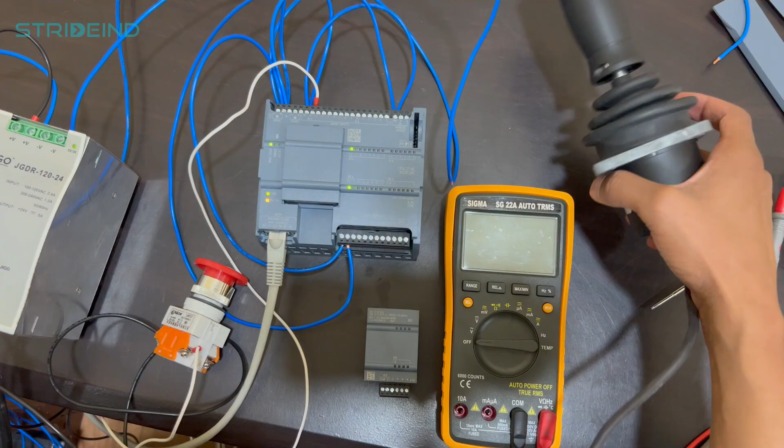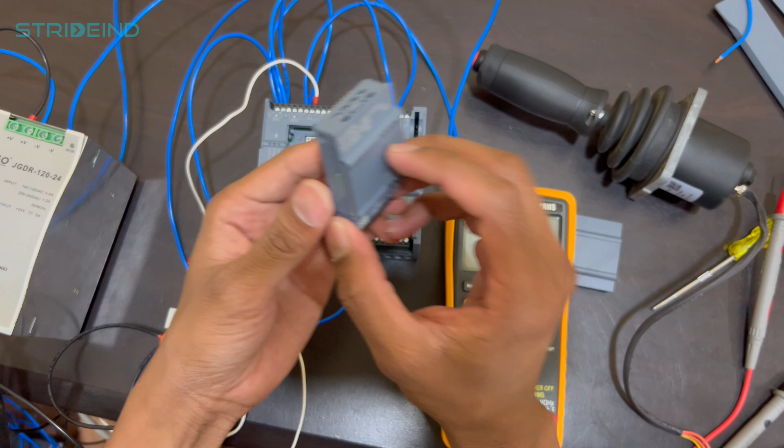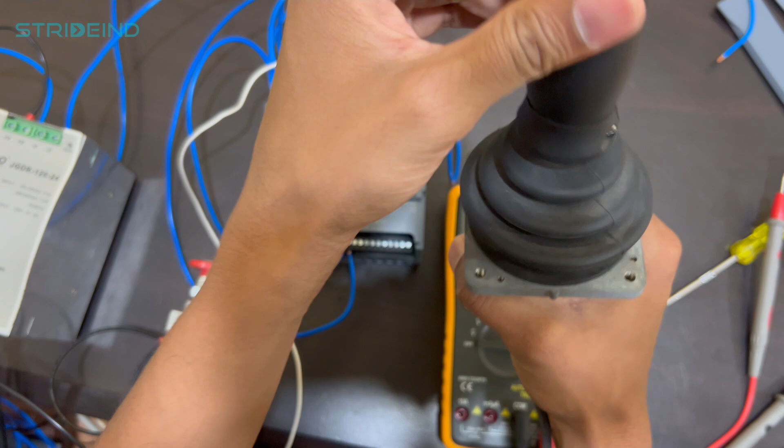First we need to set up our PLC. Let it power down. So let's say we're going to install this analog output module in the controller. So this will give us analog output. Then we need to connect this joystick. This joystick has one axis, okay, then one push button.

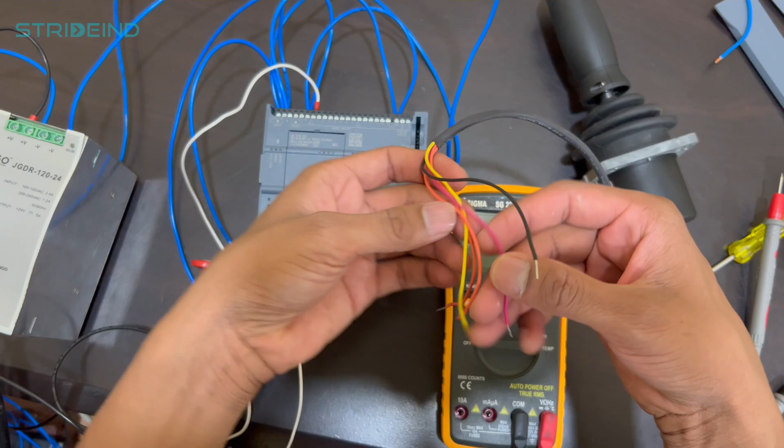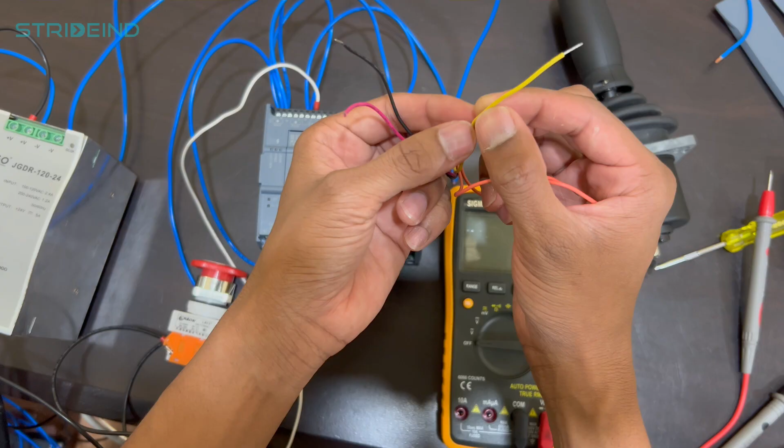So let's wire the joystick in the PLC. We need to give, this is 24 volt, this negative. This is signal analog 0 to 10 volt and this is one switch. Okay, so we're gonna wire this. Actually I'm gonna use power output from the PLC itself to get 24 volt in the joystick.

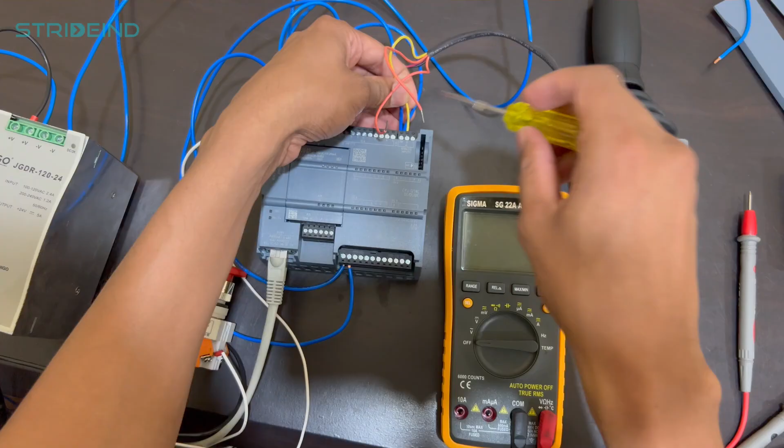Okay, that's ready. Now we'll connect this analog input to analog input 1. Okay, now we need one 24 volt. Okay, we can take it from the supply side. This will be going to our digital input number 1, that's our digital input 2. Okay, 0.1, that is our second digital input.

Okay, so now we wire up. Okay, now the wiring is ready. Just power up and make a small function test. Actually you cannot see analog input here in any light. Digital input is all you can see. So you can see the button is working, so this should work. Now we'll go inside and see how the program is working. Okay.

Let's start programming. Now this is our last program, a digital input and a digital output. So now we're gonna add one analog input and one analog output. So first we bring our joystick, this is 0 to 10 volt to 0 to 100%, and we send this back to analog output for 0 to 10 volt output. Okay, so we have 0 to 10 volt input, 0 to 10 volt output.

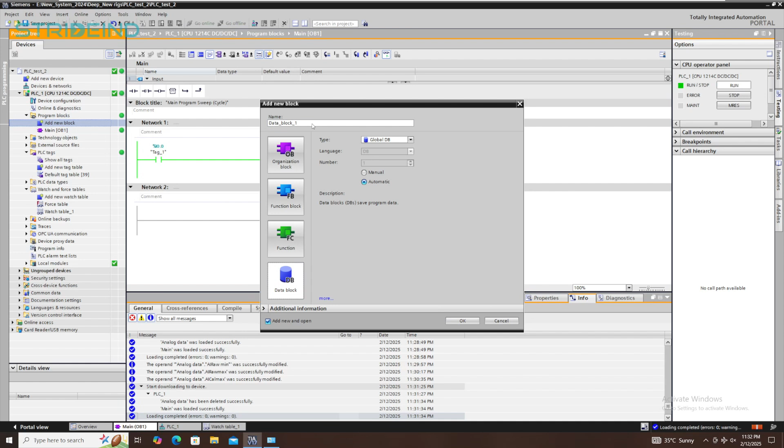So now we need to program that to happen, because you have input connected to the joystick and to the controller, and the output needs to go from the controller. Let's start with the program. Before we start the program, we add one data block where we will set a set of values, these are analog data. So we make a calibration. It's a 2-point calibration kind of thing we're gonna make here.

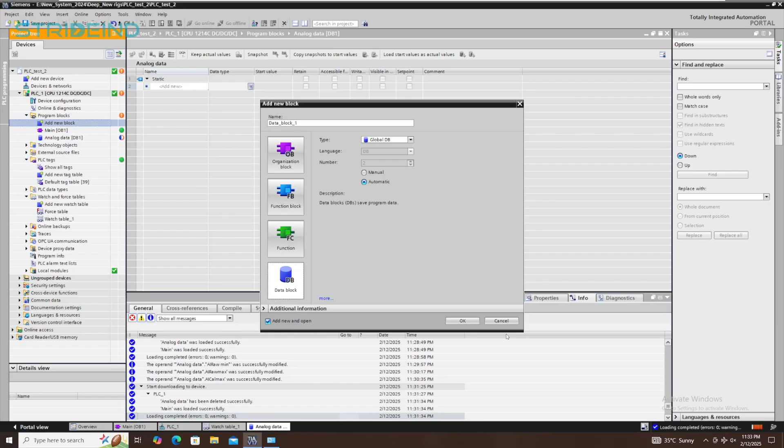Okay, I didn't explain to you what this data block is. Data blocks are a kind of database we have in the PLC, where we store the data and process the data from there. So basically when we have some tagging for a big project, we'll be adding them in the data block to identify them. So our analog data will be added in this data block, and we will say AI raw min, AI raw max. This is raw minimum, raw maximum, analog input.

Then AI NORM_X, then AI cal min, AI cal max. So this is calibration minimum and calibration maximum. Then we have our analog output, AO raw min, AO raw max, then AO NORM_X, then AO cal min, AO cal max. So these are minimum maximum calibration.

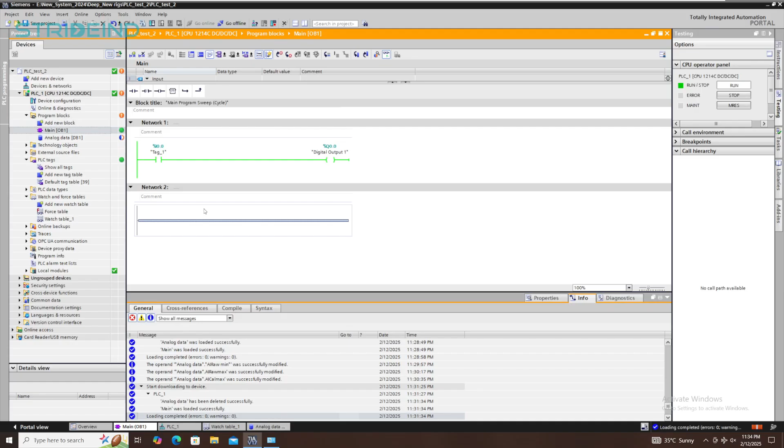You have this 2-point calibration, so you need a raw minimum and maximum value and a calibration minimum and maximum value. This is how you see it wherever you are calibrating, you have these 4 values to put. So this is the same thing we're gonna program in the PLC. So let's start programming. We will do one thing. Okay, we'll start doing it here.

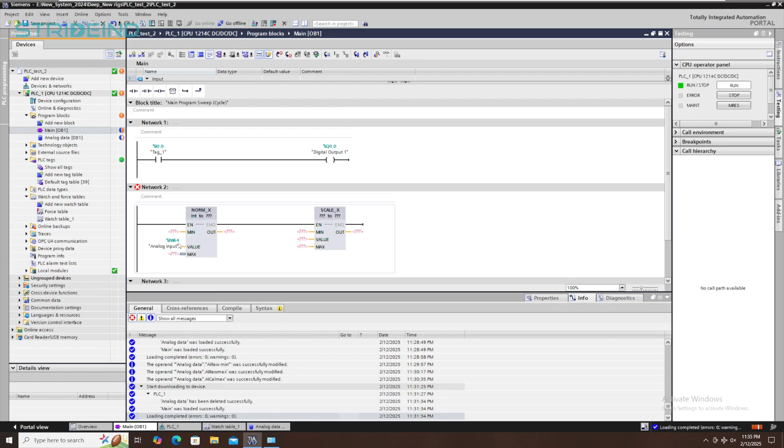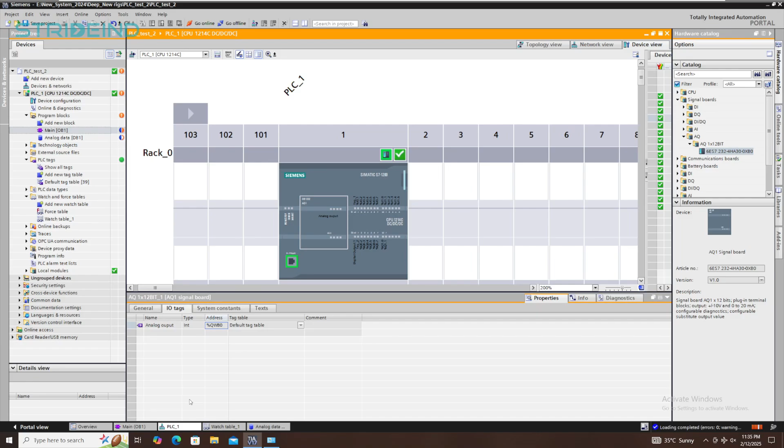Okay, so we call a block called NORM_X, then we call one block called SCALE_X. Okay, then we take our analog input. This is %IW64. Here you can see that this is our analog input and this is our analog output. Okay, so analog input, then we choose here analog data, sorry, because this needs to be real, then this needs to be real, then you need to come here again.

Okay, sorry, because I made a mistake here. All this data needs to be real. Real is a type of analog data. So we have different data types. It is integer, you can see here. You have a set of things you can put here, but we normally use real for analog data. You can also use word in some cases, but I use real data. So this first block we're doing to normalize, and the second one we're gonna scale.

So here we need to put the raw input. I will say raw minimum and raw maximum, and output going to NORM_X out. This is AI NORM_X. Then this one again goes here, input for the SCALE_X. Then for the SCALE_X we're gonna use cal minimum and cal maximum. Now we need to have one output. This is our real output of joystick position. We say joystick position.

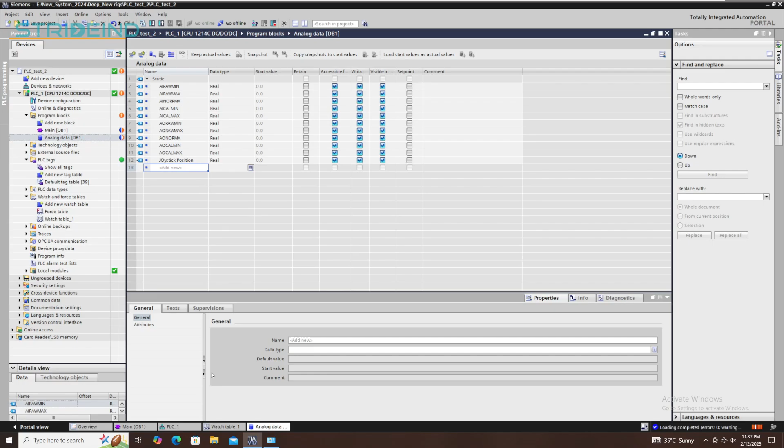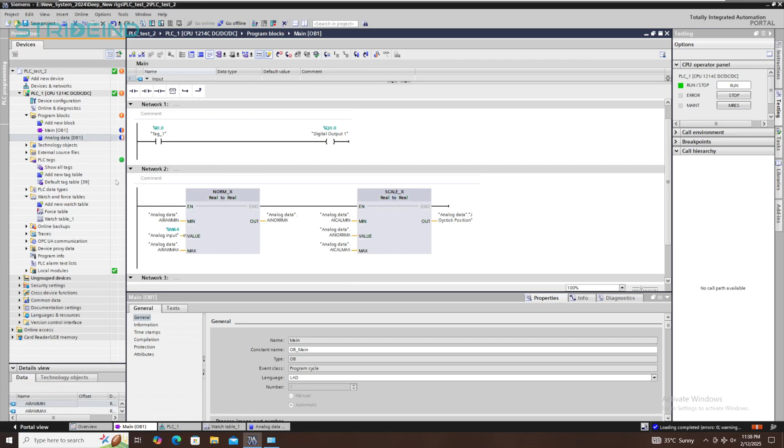So our joystick is 0 to 10 volt, and now it's in the middle position. So how this works in Siemens: we have 4 to 20 milliamps, let's say 0 to 20 milliamps, starting from 0 to 27500. This is the number. So when you have 20 milliamps, it will be 27500, and when it is 0, it's 0.

Same for analog input 0 to 10 volt. We should have a minimum, let's say half of this. So 27500 divided by 2 is 13750. So we have 0 for calibrate raw minimum, and our raw maximum should be 13750, and we need to have our joystick full position to 100.

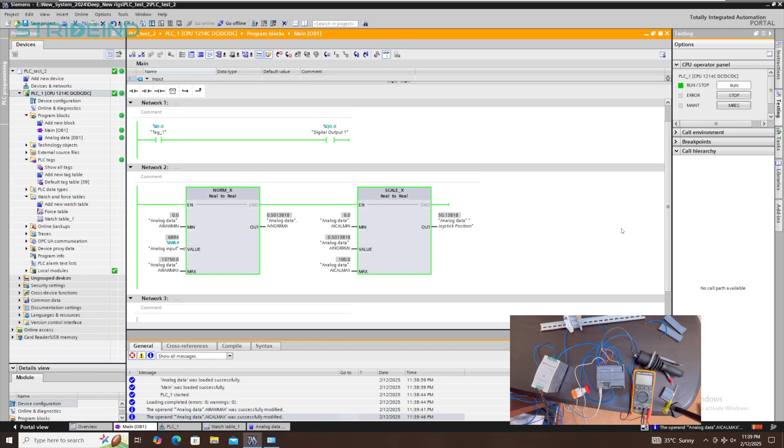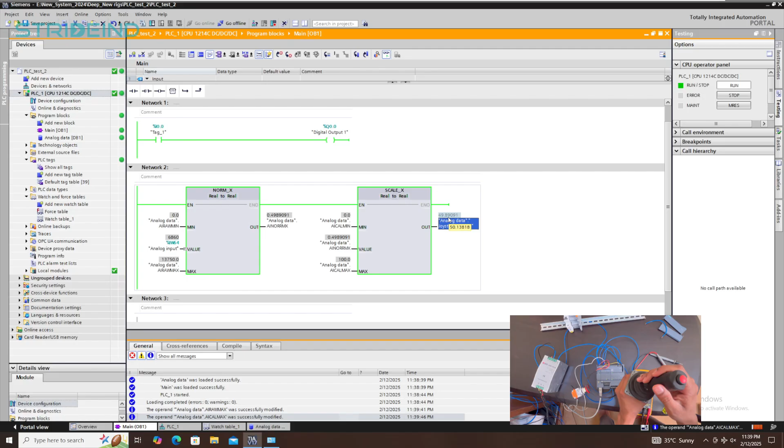Okay, so now you can see your analog output joystick. We made the calibration, so this is our joystick calibration completed. Now we have 50% because our joystick is staying in half position. Now I will move the joystick to 0 and 100 position, and you will see it's changing there. So moving to one direction, it is 100, and moving to another, it is coming to 10%. So when the joystick is minimum, we are seeing a number of 1399.

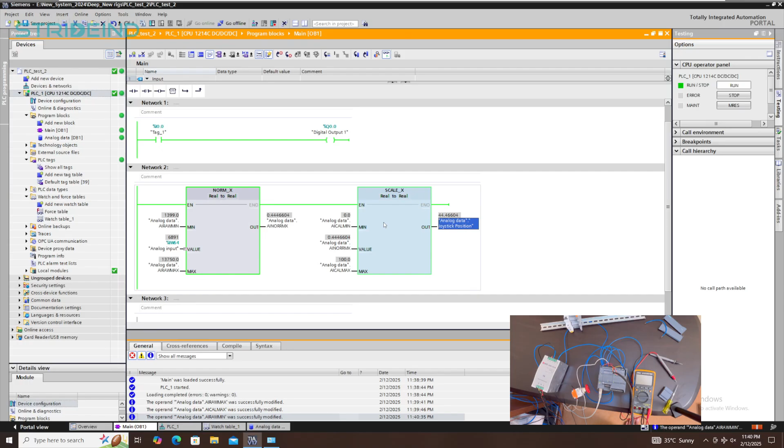So we need to give that 1399 as our... no, actually we don't need to give that. Only we need to make sure how much is coming. This is your full position, 12423. So now we need to give here 12425, and it's changing here because this joystick is not giving exactly 0 to 10 volt.

So this is in, okay, now we have 100%, and okay, here is our problem. So now we need to give 1399 as 0 position. Okay, so why it's happening, we need to figure out. Take the multimeter and look with the multimeter. This is 2.4 volt.

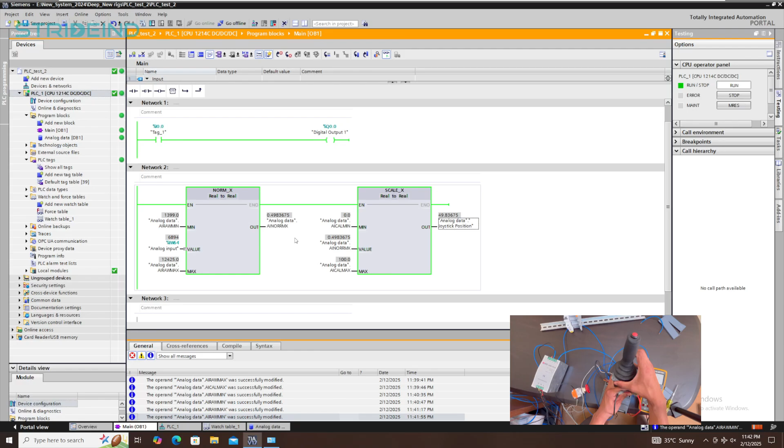Okay, this is 4.5 volt, 0.5 volt. Okay, you can see here, when I move this, it's going to 0. So 2.5 volts, 0.5 volt is our minimum position, 4.5 volt our full position. So this is not 0 to 10 volts, this is actually a 0 to 5 volt joystick. Okay, so that's why we have this reading here.

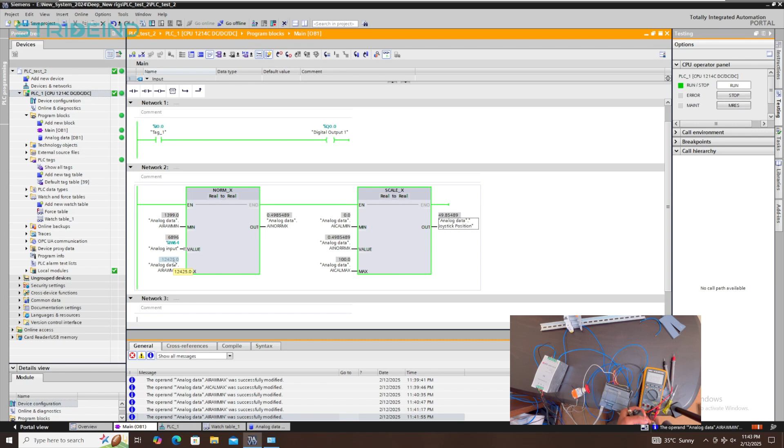So we have 0.5 volt, that is 1399, then 12425, this is 4 point some volt, not exactly 5 volt, close to 5 volt. So now our joystick position is 9900. Okay, so we have now joystick calibration completed. Now we're gonna do analog output. So we have 0 to 5 volt input, we will be converting that back to 0 to 10 volt.

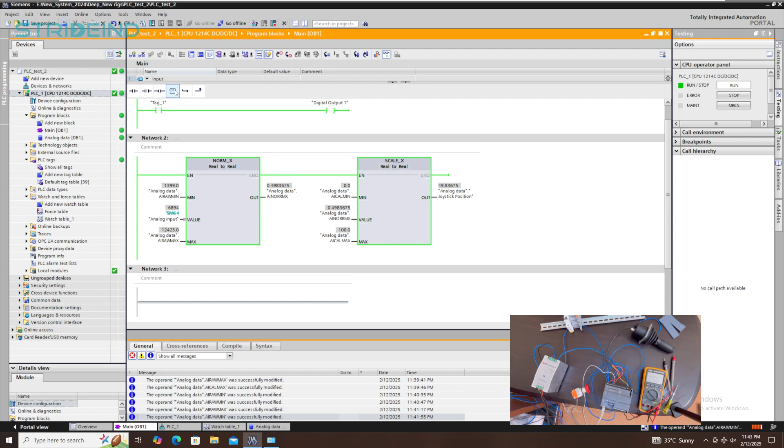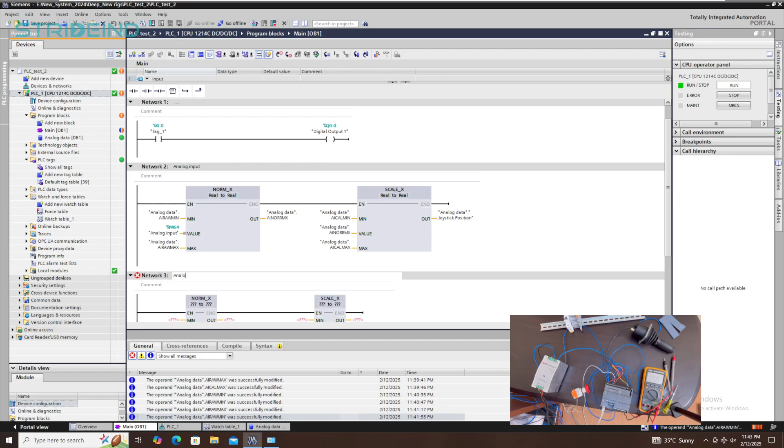Okay, so for this we need to use NORM_X again, and SCALE_X again. Okay, so this is our analog input and this is our analog output. So now what we need is this joystick value we will give here, then our raw maximum, our scaled minimum, scaled maximum,

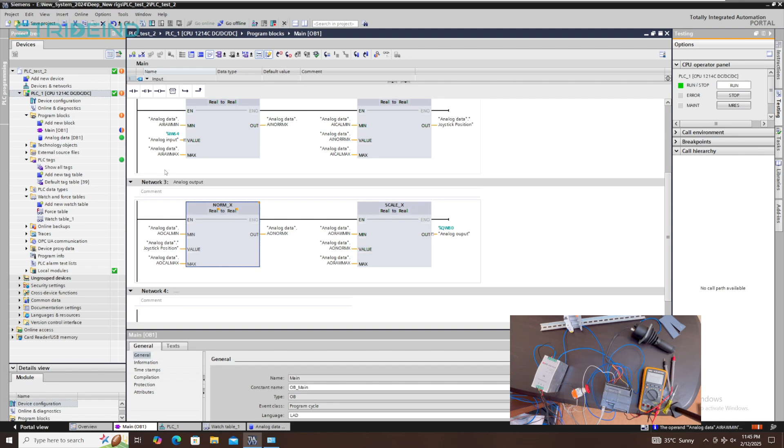Now download this to the controller. Okay, this controller is showing 50. So now we need to make calibration. Here is 0, here is 100%, 0 to 10 volt. Actually, wait a moment, we have here an analog output module that is plus or minus 10 volts, so we need to give only the positive side.

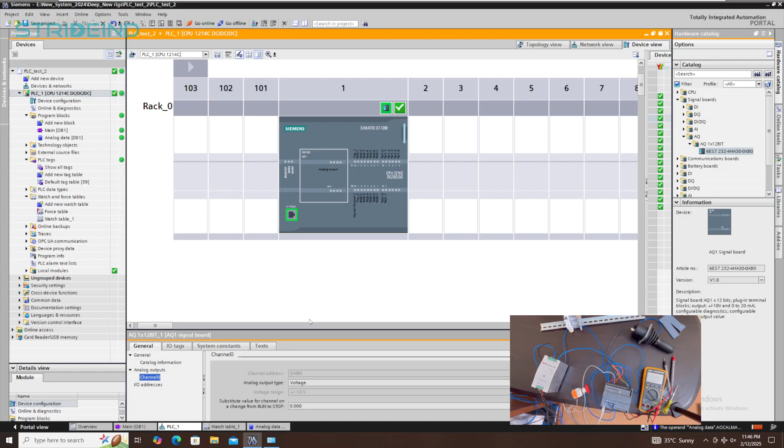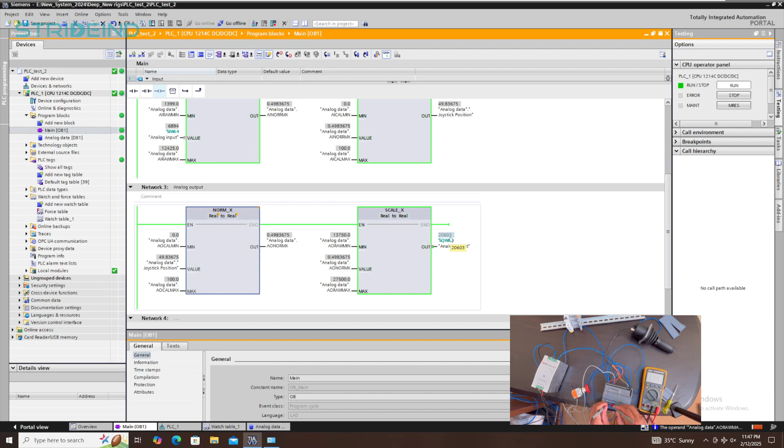Let's see, we need to work this out. So 27,500 divided by 2, let's try like this, 13,750, then we give 27,500. Let's see if this can work. So this is giving how many volts? That's 7.45 volts. Okay, that's okay. No, that shouldn't be okay. Let's calculate.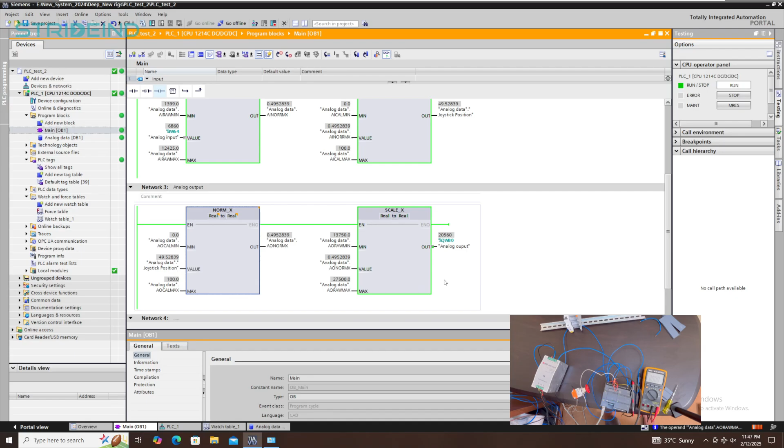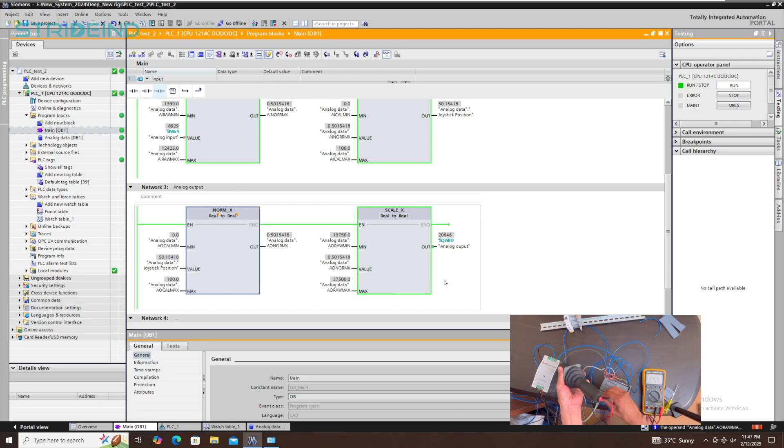Let me make a study here. Okay, there is 4.9 volts, so we need to give 0. Let's try 0.

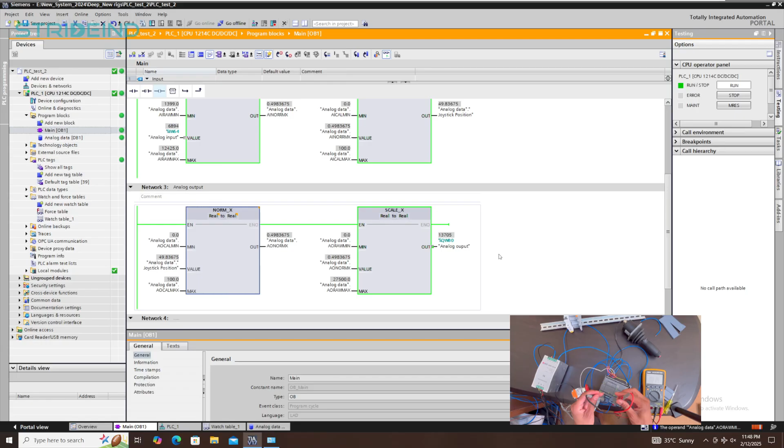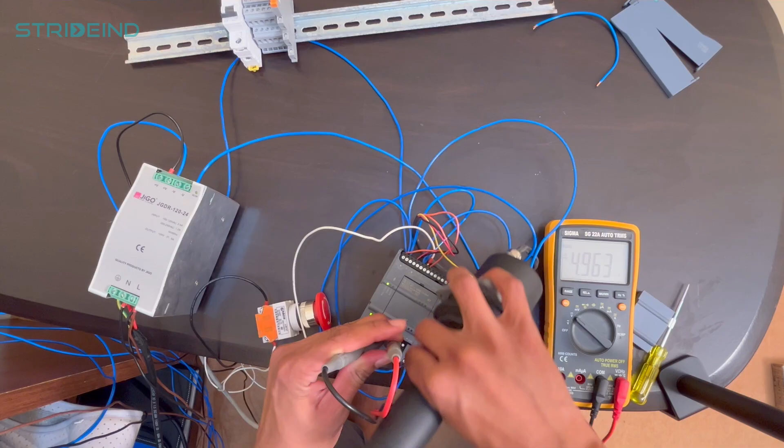Oh, don't break my connectors. I'm a little bit strange guy playing with PLCs. Because this is too hard to move.

Okay, this is one side, it's okay. Zero volts, okay. So you can see here now the joystick in the middle position is 5 volts, joystick moving to 0 position is 0 volts, moving to full position is 10 volts. So this is how we make calibration inside the PLC for analog input and analog output.

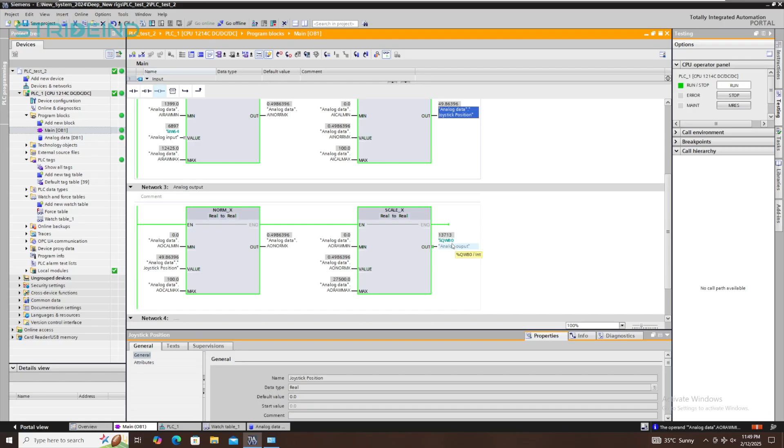So the process here I will explain one more time. You have your analog input, you calibrated this to 0 to 100%, then you took that 0 to 100% to 0 to 10 volt analog output. So your 0 to 5 volt analog input you converted to 0 to 10 volt output. So you can operate one proportional solenoid with this joystick. This is how analog input and analog output work inside the PLC.